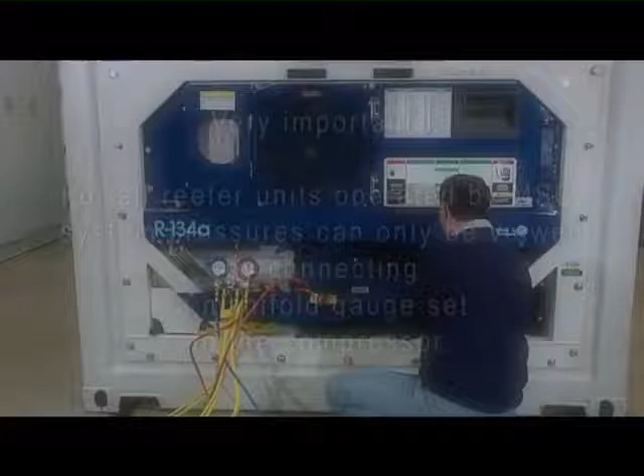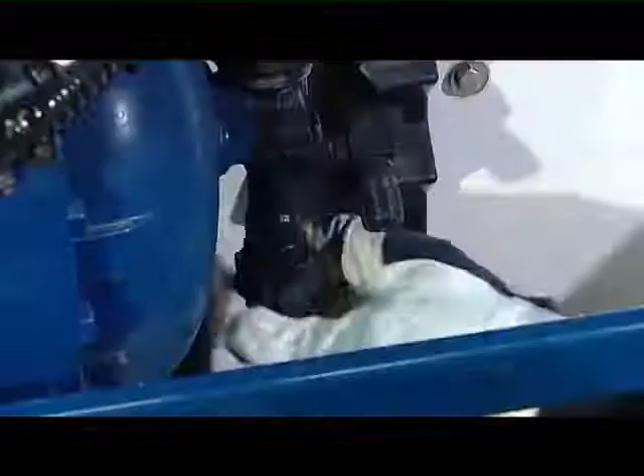Do note that for all reefer units operated by MSC, system pressures can only be viewed by connecting a manifold gauge set to the compressor. When the system is in normal operation, the service valves are back-seated. Mid-seated valve positions allow the technician to monitor system pressures. Front-seated position isolates the compressor from the system.

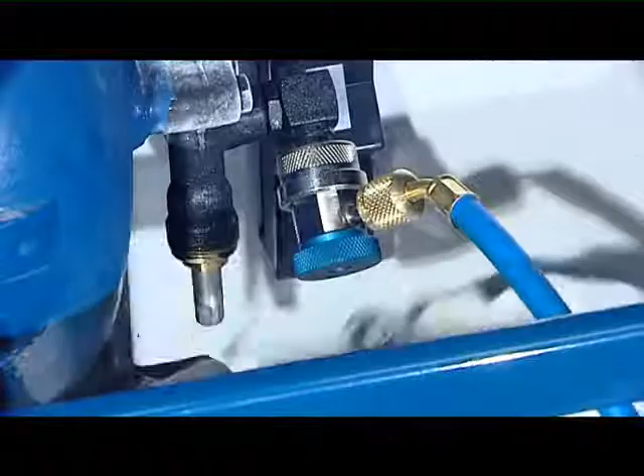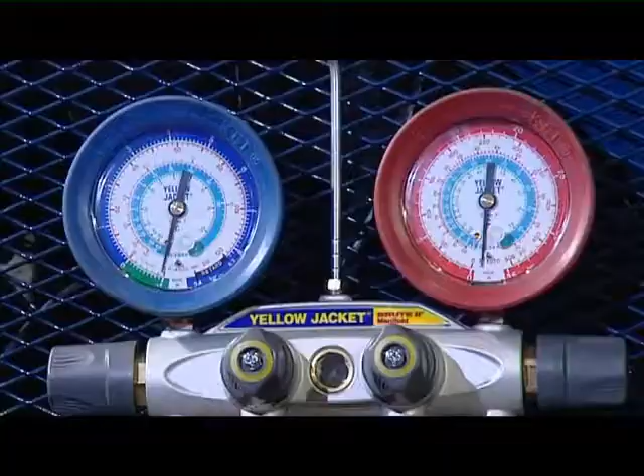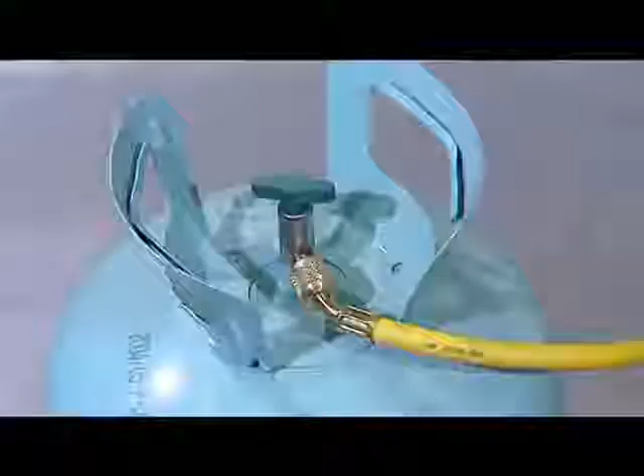The manifold gauge set consists of a low-side gauge, a high-side gauge, and 4 hoses. The low-side blue gauge reads pressure or vacuum, and the high-side red gauge reads pressure only. There is a red hose for the high side, a blue hose for the low side, a yellow hose for connection to a refrigerant cylinder for charging refrigerant to the system, and the second yellow hose, a larger size, for connecting to a vacuum pump when evacuating.

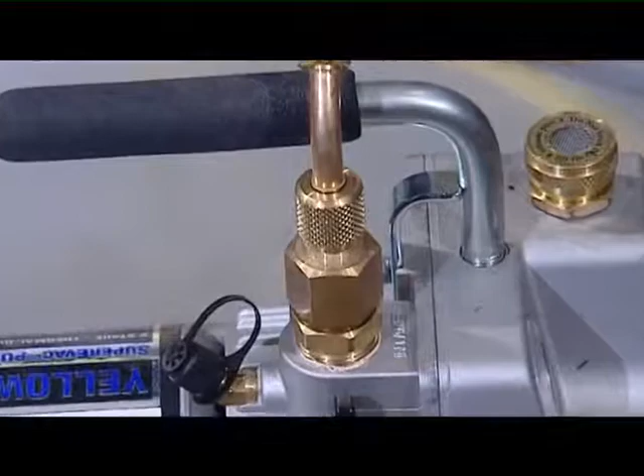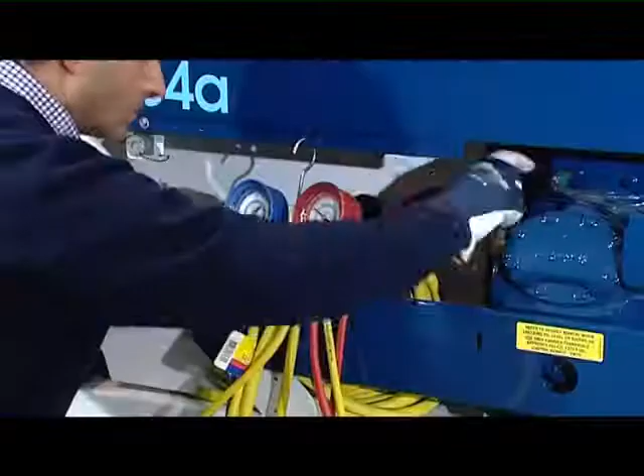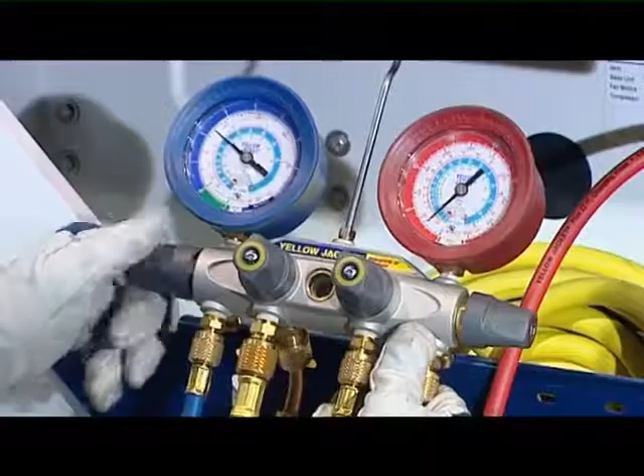Very important. Before a manifold gauge set is connected to the unit, the hoses and the manifold must be purged of air. See vacuum pump section. To properly remove a manifold gauge set, first backseat the compressor discharge service valve, then open both valves on the manifold. In this way, with the compressor running, the refrigerant inside the manifold will be aspirated into the compressor. Backseat the compressor suction service valve and disconnect the manifold hoses from the unit.

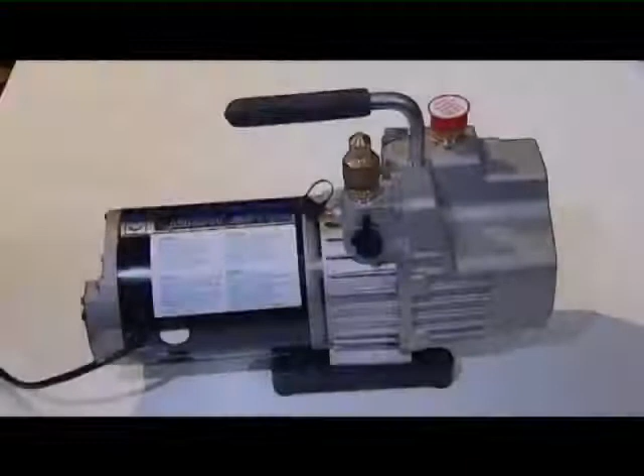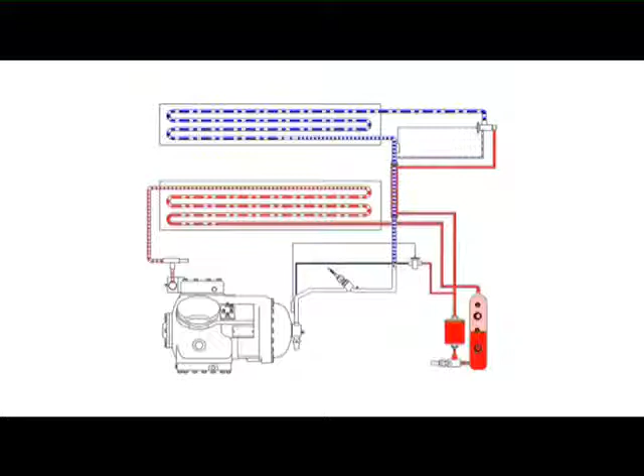The vacuum pump. Moisture is the deadly enemy of the refrigeration system. The presence of moisture in a refrigeration system can have many undesirable effects, the most common of which is the formation of acids, resulting in metal corrosion. For this reason, it's very important that a refrigeration system is properly evacuated and dehydrated before filling the refrigerant. The essential tools are a vacuum pump and a gauge manifold set.

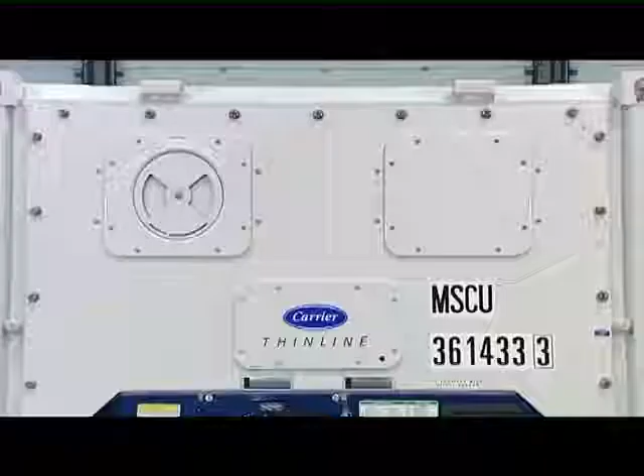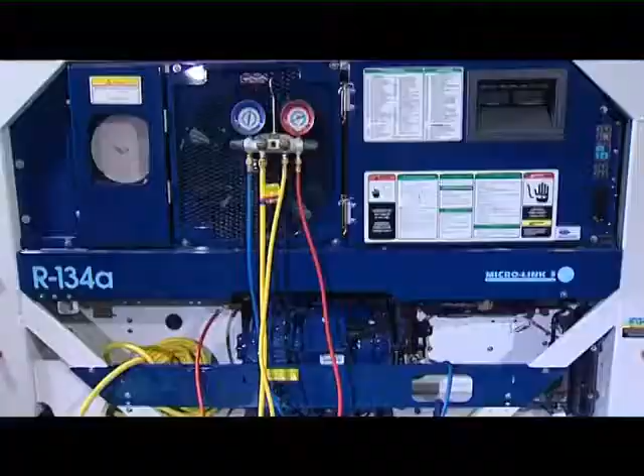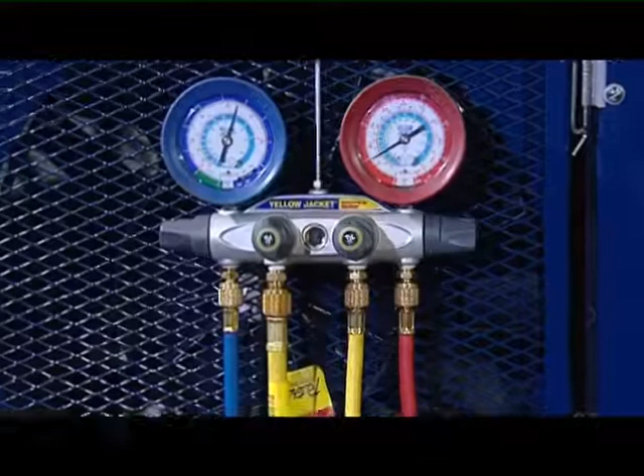Evacuation procedure. Only when the system is empty can you connect the vacuum pump to start to evacuate it. We recommend that you always replace the filter drier. Connect the large yellow hose to the vacuum pump. Connect the red hose between the high side valve and the discharge side of the system. Connect the blue hose between the low side valve and the suction side of the system. Connect the smaller yellow hose to the refrigerant tank. Open the hand valves on the manifold.

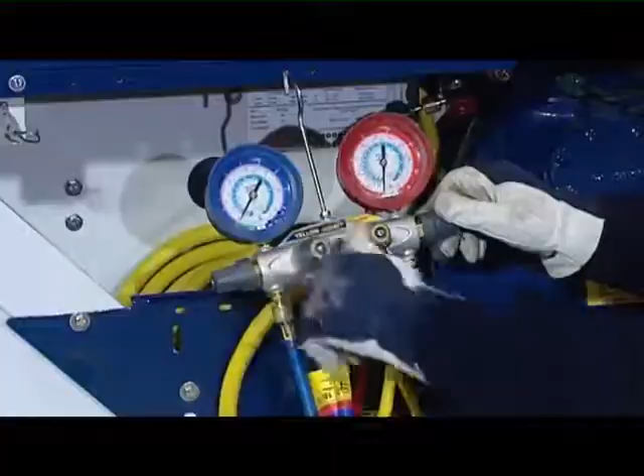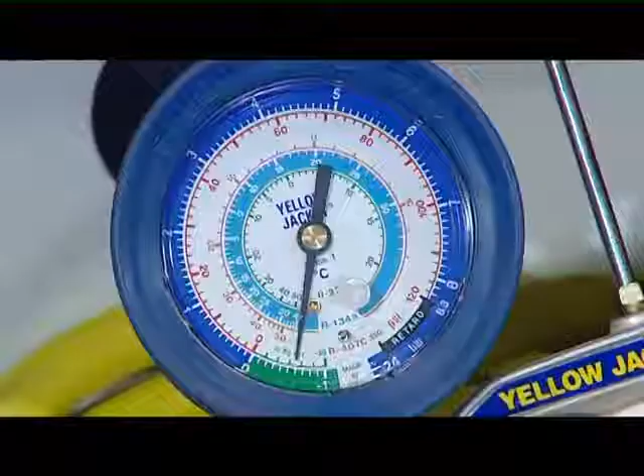Start the vacuum pump. Evacuate the system until a deep vacuum is reached, as can be read on the manifold. Switch off the pump. Close all the hand valves on the manifold and see if the vacuum holds. Wait to check if there is residual moisture or leaks. If the vacuum holds, the pump can be disconnected and the system is now ready to be filled with a new charge.

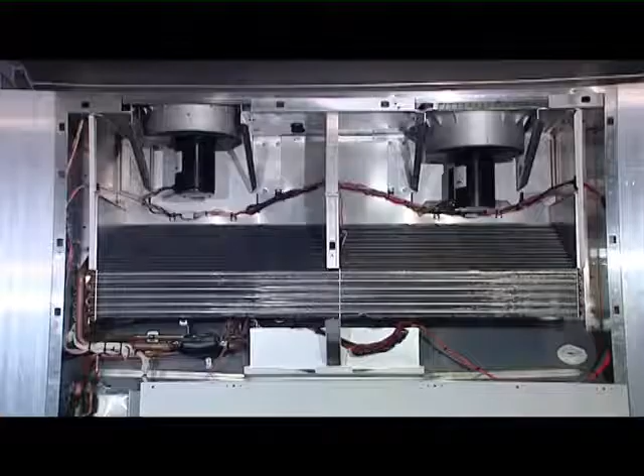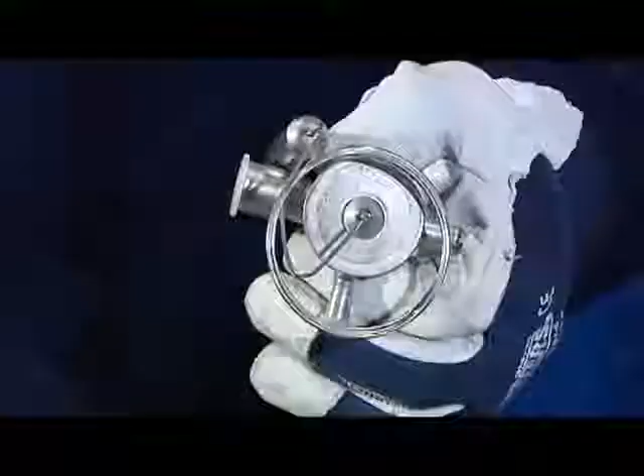Thermostatic expansion valve. This valve prevents liquid refrigerant entering the compressor and controls the amount of refrigerant entering the evaporator coil. The thermostatic expansion valve is not adjustable and when defective has to be replaced. All connections on the hermetic valve are bimetallic, copper on the inside and stainless steel on the outside. All joints on this valve are brazed.

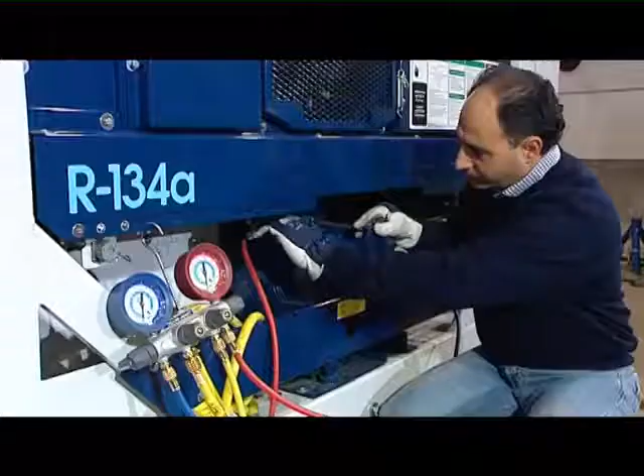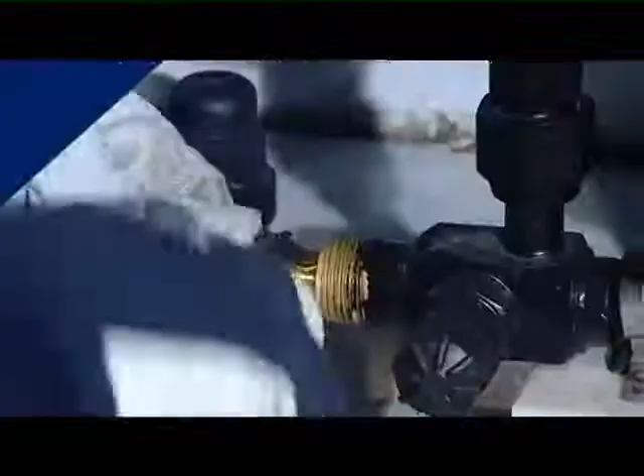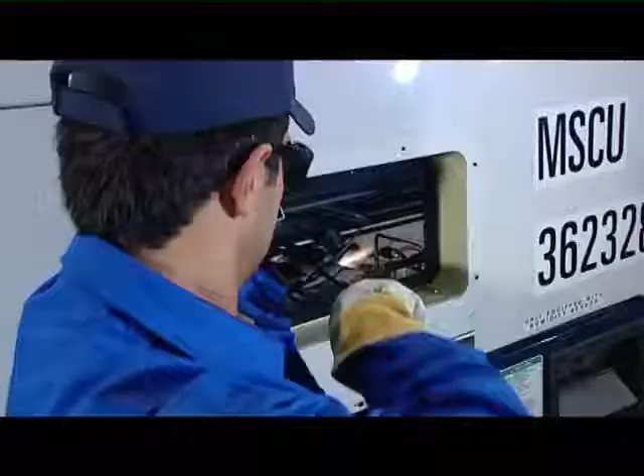To replace the TXV valve, you first have to pump down the unit as follows. Connect the manifold to the compressor's valve and read the pressures. Switch on the unit and place the king valve completely front-seated. When the gauge indicates vacuum, switch off the unit and place the discharge valve completely front-seated. Open both hand valves on the manifold. Now you can replace the TXV valve.

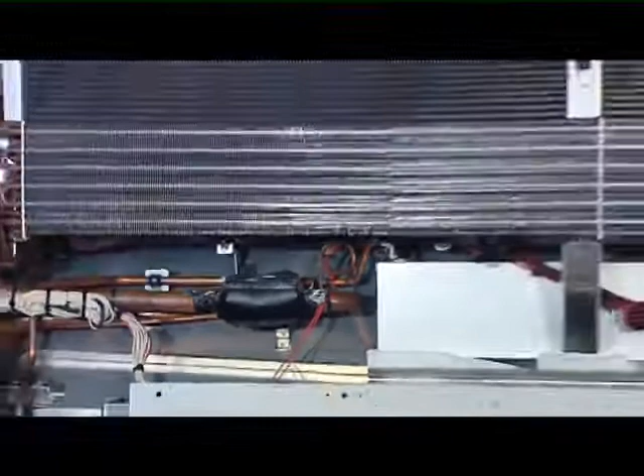Unbraze the valve's connections. Remove the valve and, in an emergency, simply cut the capillary tube. When fitting the new valve bulb, place it as far as you can reach, but it's very important to fasten it securely and insulate it. When replacing the TXV valve, always replace the filter dryer.

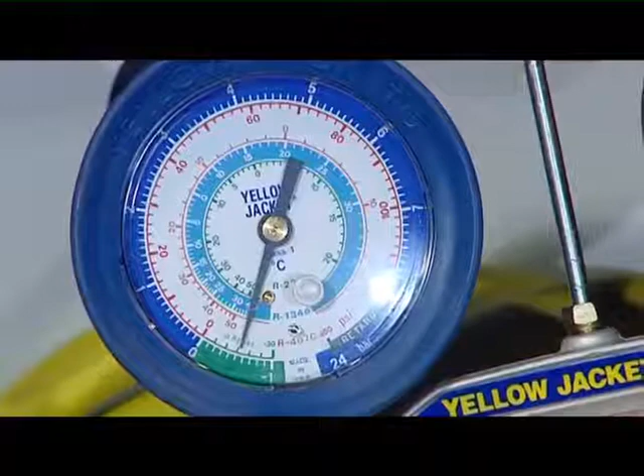Once the TXV valve and filter are replaced, you have to vacuum the system as follows. Connect the big yellow hose to the pump. Open the hand valve on the manifold and start the vacuum pump. When the system is under vacuum, switch the pump off and close all the hand valves on the manifold.

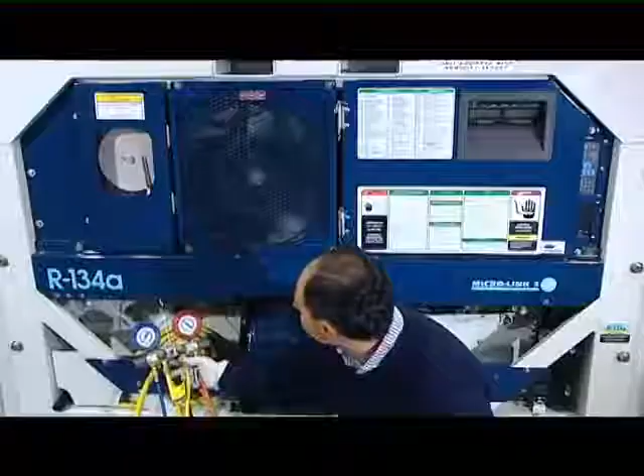Open the discharge valve of the compressor and place the king valve in the back-seated position. Switch the unit on and check if the pressures are all right. To remove the gauge manifold set, see the Checking Compressor Pressures section.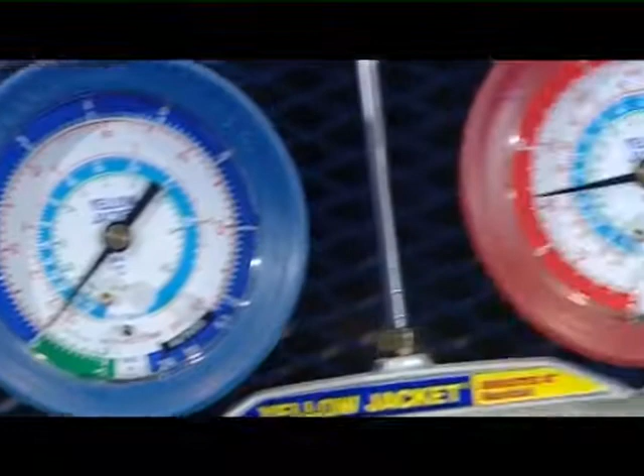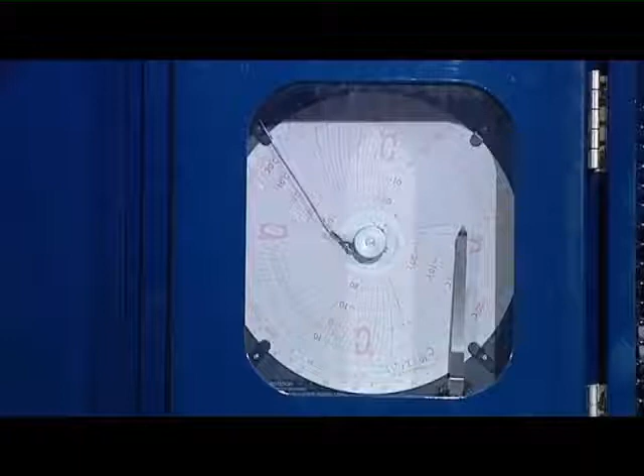Electronic Partlow. The electronic Partlow automatically records the return or the supply air temperature depending on the set point. The recorder reads and records data from the controller. It can be compared to a printer. The recorder will stop when the power is switched off.

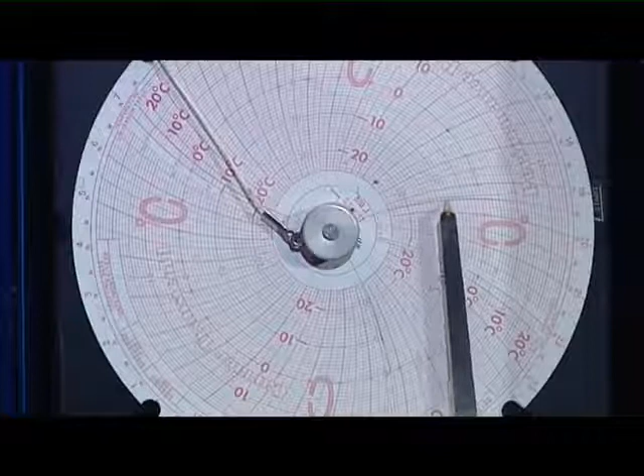It's possible to calibrate the electronic Partlow by pressing the calibration button on the bottom of the recorder. The pen will drive completely downscale and then move back to 0 degrees and stop. If the pen is exactly on 0 degrees, the recorder is in calibration. Press the calibration button once again and the pen will return to the correct temperature readings.

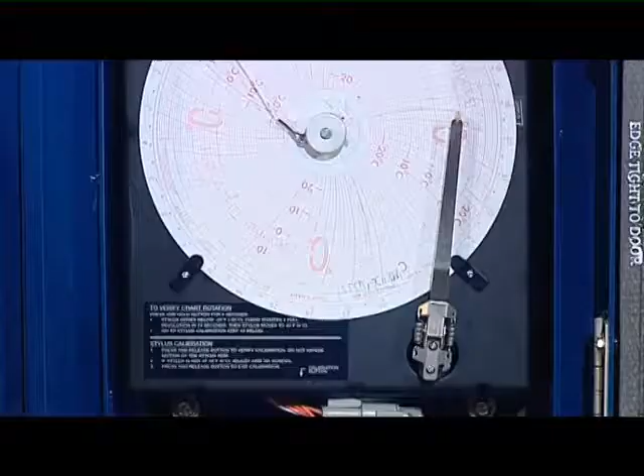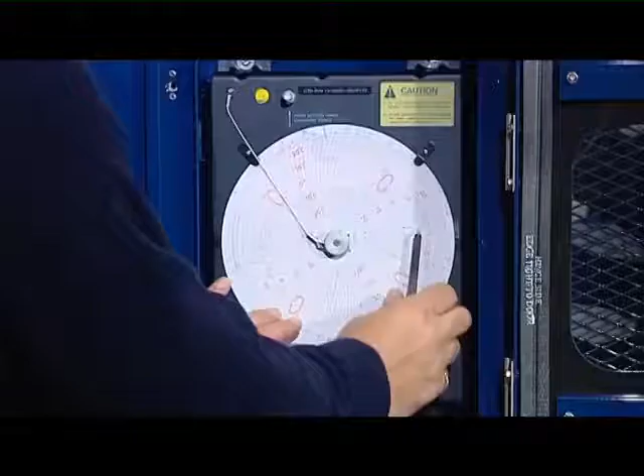If during calibration the pen is not marking 0, you'll have to adjust it manually by loosening both screws of the pen and placing it on the 0. Refasten screws and the adjustment is complete. When replacing the chart with a new one, always keep the original inside the electrical box, as it's often required at the discharge port.

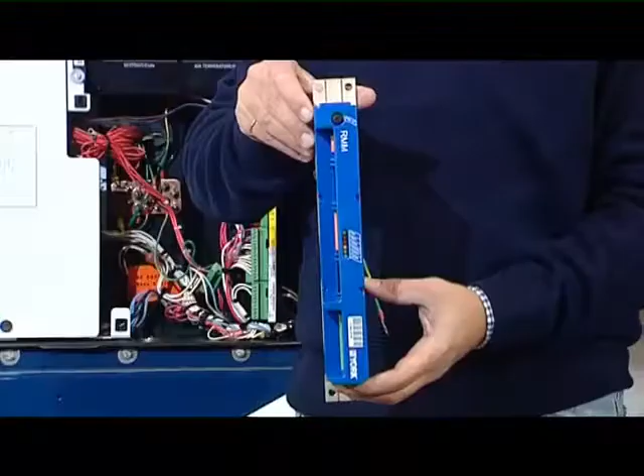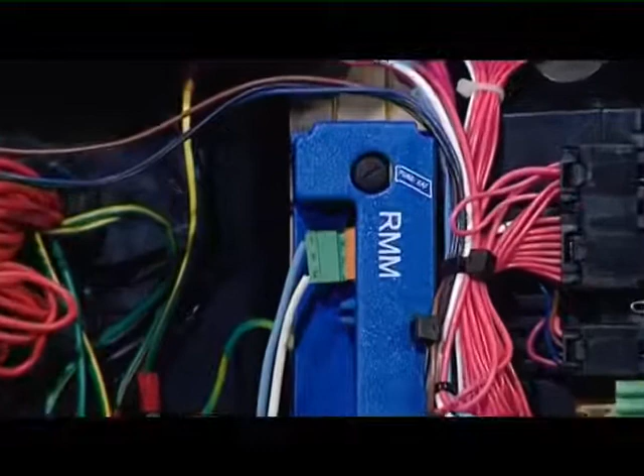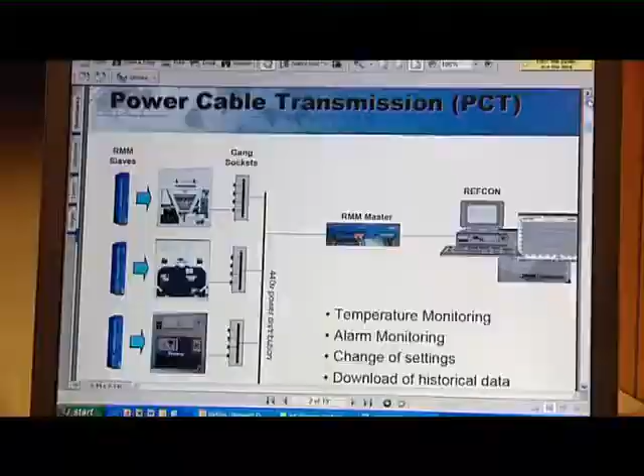Reefer containers fitted with an RMM, a remote monitoring module. In the near future, all the reefer containers operated by MSC, MicroLink 2, 2i and 3 types, will have a power cable modem known as RMM, Remote Monitoring Module, installed. The RMM modems are used for remote monitoring of reefer containers using power lines. The RMM allows the controllers of the containers to transmit their data and to receive information to and from the vessel monitoring system. All reefer containers connected and mounted with RMM will, through master modems, communicate and transmit information to the main PC installed normally on the bridge of the vessels.

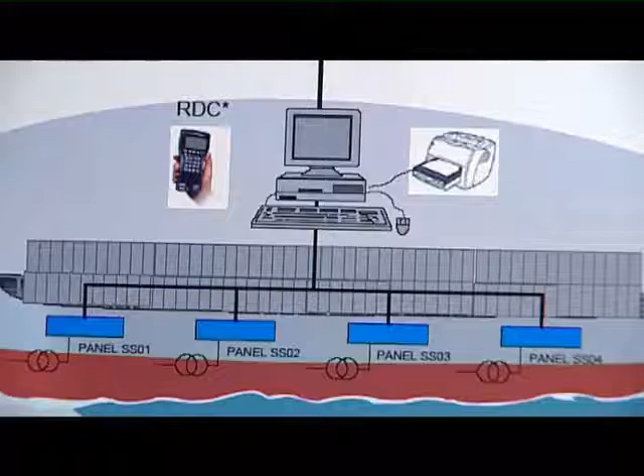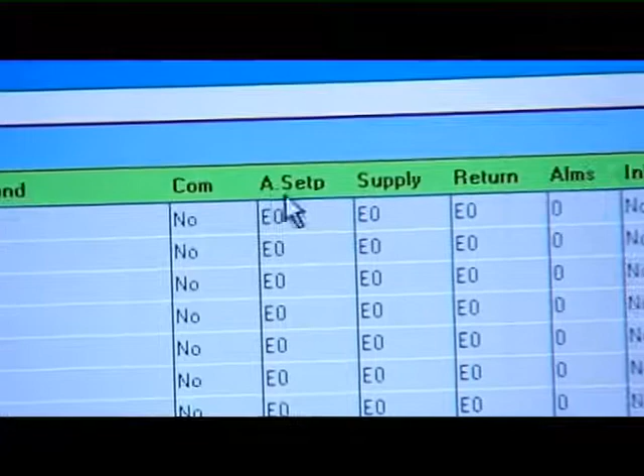Through this PC, the vessel monitoring system can constantly monitor the reefer containers and will also, in case of a malfunction, indicate an alarm. Amongst the options available on the PC station are the change of the set point and the change of the container ID. Very important, do not exchange modems between different reefer containers.

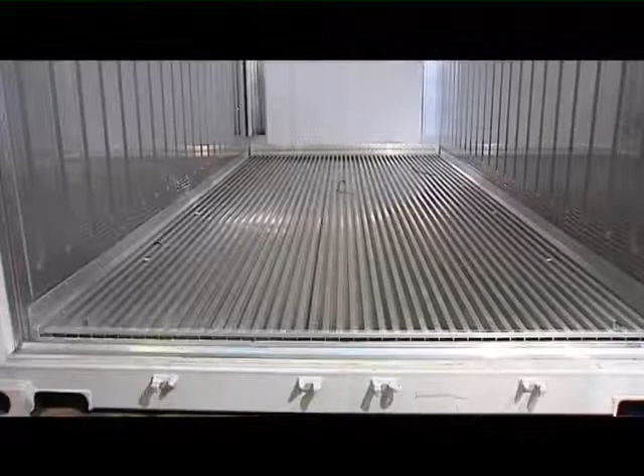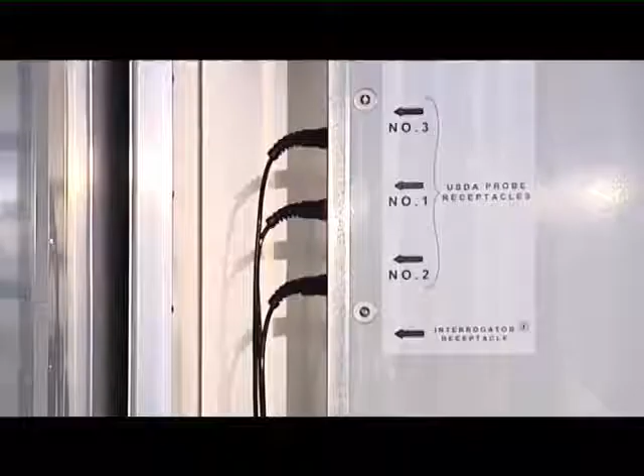USDA cold treatment. USDA cold treatment is used to kill fruit flies by carrying the fruit at a sustained temperature. The cargo temperature will need more accurate monitoring, and for this reason, containers are equipped with 3 extra sensors which are fitted while filling the container with its cargo. The preparation of these reefers, specifically the machinery, calibration of the extra probes, filling the container with its cargo, is carried out by USDA authorized personnel.

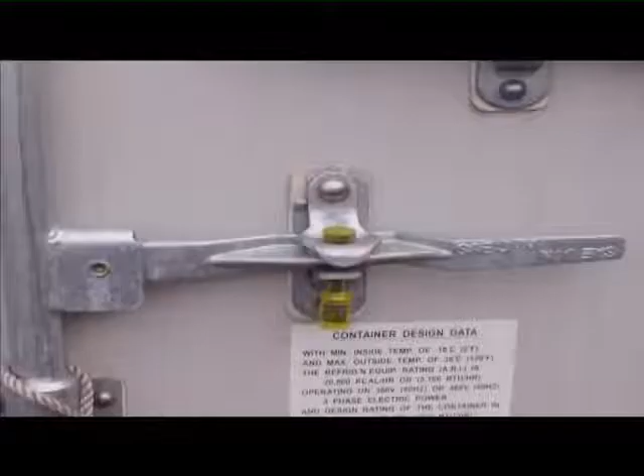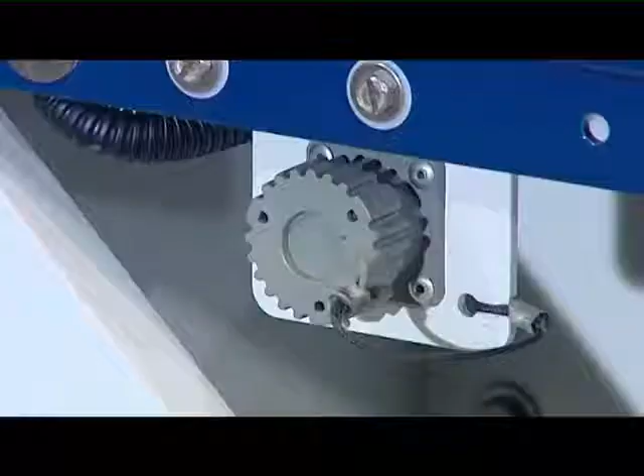Once the container is filled and sealed, a set of documents containing certificates and instructions are delivered to the master. Among the documents are the procedures to be followed on board for the daily temperature reporting, for reporting malfunctions, and the instructions for eventual change of set point. Everything happening with these reefer containers, including sensor readings, is recorded and can be viewed at the end of the voyage to check whether procedures have been followed correctly and if the cold treatment has been successful.

Before the vessel sails, the master and chief engineer will be shown how to retrieve temperature readings from the supply, return and USDA 1, 2, 3 probes. Readings have to be sent twice a day or more if so requested. Readings are obtained as follows. Supply and return by pressing the supply/return key on the keypad. Values are shown in the right window of the display.

The USDA probes readings are obtained as follows. Press the Alt mode key and select DC. The required codes are: for probe 1, select DC3. For probe 2, select DC4. For probe 3, select DC5. And for probe 4, not always required, select DC14. Temperatures always have to be reported in Celsius.

Reefer units running in dehumidification mode. Dehumidification mode is used to reduce the level of humidity inside the containers. On MSC-operated reefer containers, humidity can be reduced down to 65%. When requested by the shipper, before the reefer container is loaded on board, the desired humidity percentage can be set and the controller activated to operate in dehumidification mode by a reefer technician.

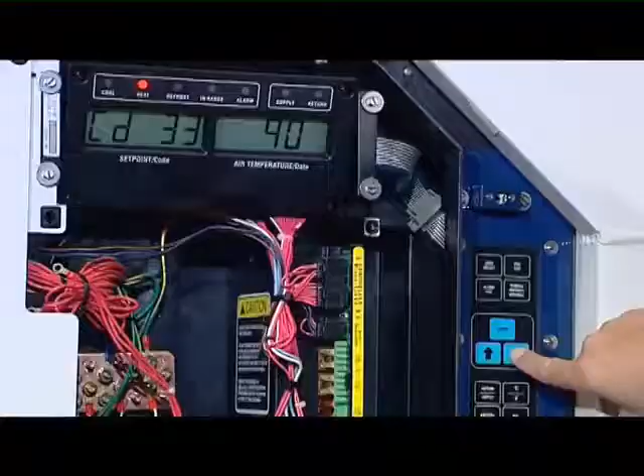Please note that when dehumidification mode is activated, the supply LED will flash continuously. To activate the dehumidification mode, code 33 has to be selected, and only then the humidity percentage can be set.